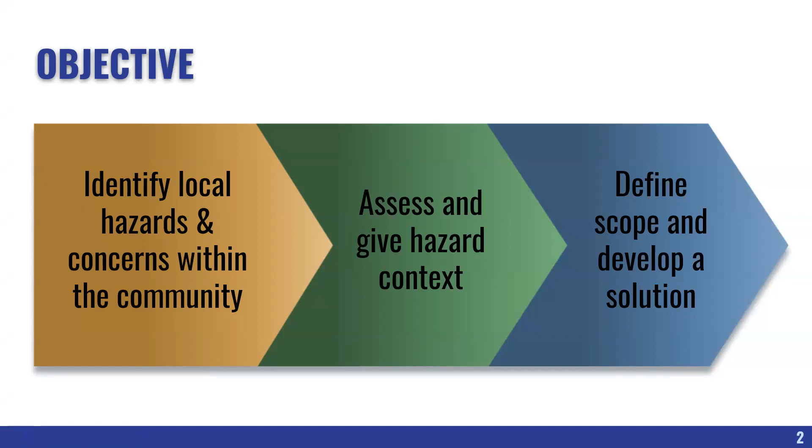So the main objectives for our senior design course specifically were to identify local hazards in the community, and then to give context to that hazard and assess it through creating a project scope and developing a solution for that hazard. So in order to fulfill this objective, we were tasked with using the design thinking process, which breaks down the project into 5 main steps.

First one is empathizing with the stakeholder. In this case, it's the whole community, and being able to see what kind of hazards are in place and what things could happen again. Defining, actually selecting a hazard; ideating, which is brainstorming, coming up with solutions; and then prototyping and testing is really seeing, is our solution effective and useful?

So before we could pick a hazard, we had to empathize with the Houghton community. And to do this, we took a look at the local population and the risks to safety and how transportation is affected in the area. And some major incidents that we looked at were the yearly snowfall, the Portage Lake lift bridge outage, and the 2018 Father's Day flood.

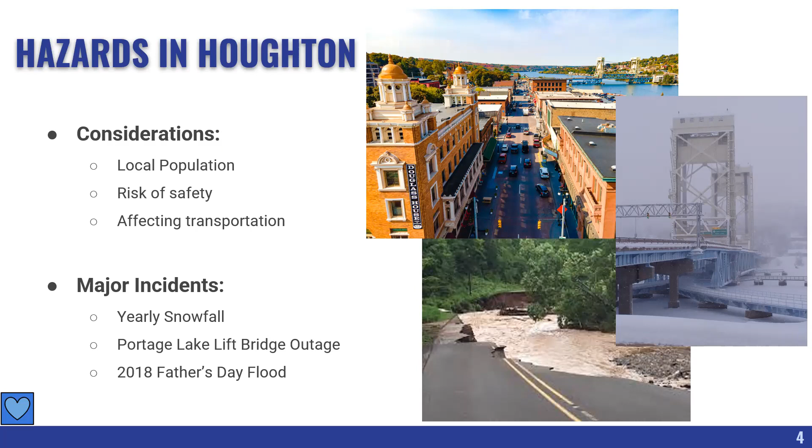So going more off the Father's Day flood, it was a 1,000-year storm event with a 500-year storm event the following weekend. It affected central Houghton County and it overwhelmed the roadways with the amount of water that was thrown on during that time. And for Agate Street, as in here, it caused catastrophic failure of the roadway, where it was unusable until it was able to be remade.

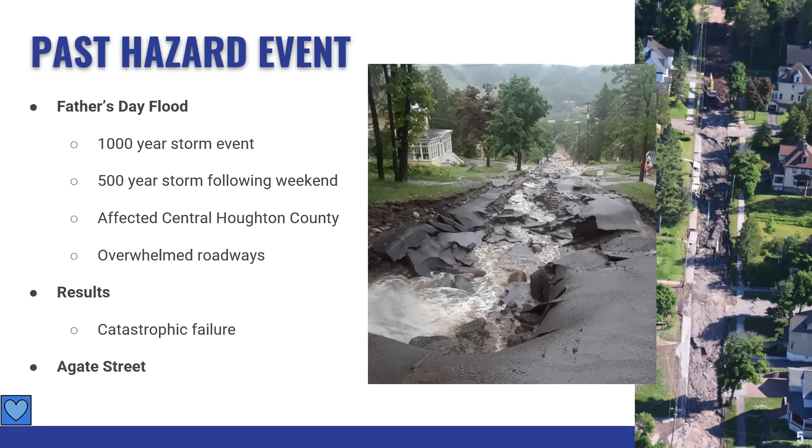So the reason that we chose to focus on Agate Street is because it failed worse than most of the other roads around here. And the reason it failed so bad was because, in combination with the steep slope and the large amount of water, the water went over the sides of the road and eroded the soil along the edges, and eventually got underneath the road and washed out all of the sub base underneath, causing it to completely just collapse because there's nothing there to support it.

And so the main objective of our project was to come up with some kind of solution that would prevent that kind of failure from happening again. And like we mentioned before, the main stakeholders of this project are the residents that live along Agate Street, US 41 traffic, and the Houghton community.

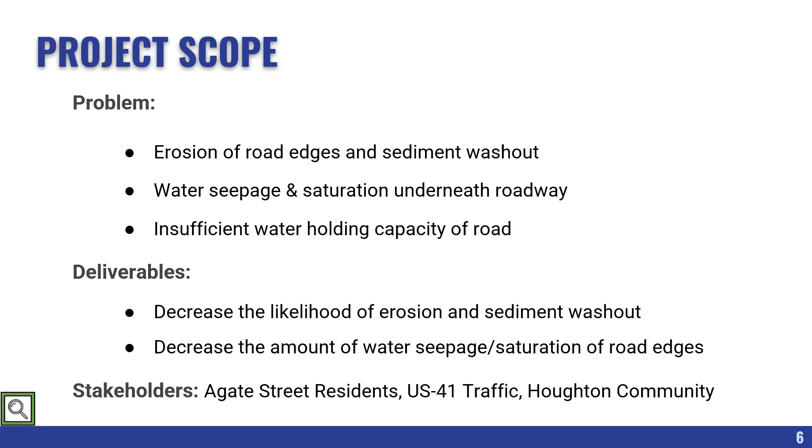So we started our brainstorming process. We came up with 3 ideas initially. The first was a curb and gutter system; we were thinking that would just act like a wall to keep the water from going over the edges of the road. Our second idea was to repave the road with a reverse crown instead of a normal crown in the middle like the road usually has. So that would keep the water in the middle of the road instead of directing it towards the edges and washing out more soil. But along with this idea would come ice build up in the winter and more wear and tear on the road.

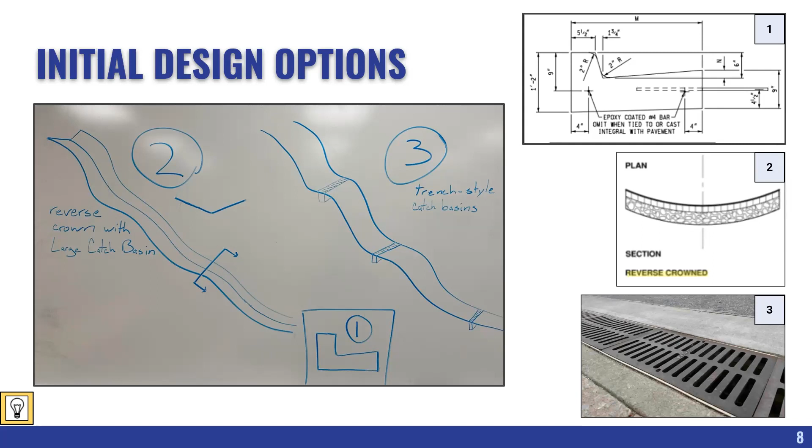So to better understand the specific pain points of our hazard, we decided to perform a hazard analysis where we took the varying potential failures and their effects, and we quantified them by assigning numbers to things like failure severity, probability of occurrence, and probability of detection. We would multiply them across for each possible failure, and then it would give us a risk priority number.

So the highest risk priority number is going to be more concerning and more hazardous for us. And as you can see, erosion on the street edges and saturation beneath the road, like Curtis talked about earlier, is going to be our biggest issue and most concerning, and have the highest RPN number.

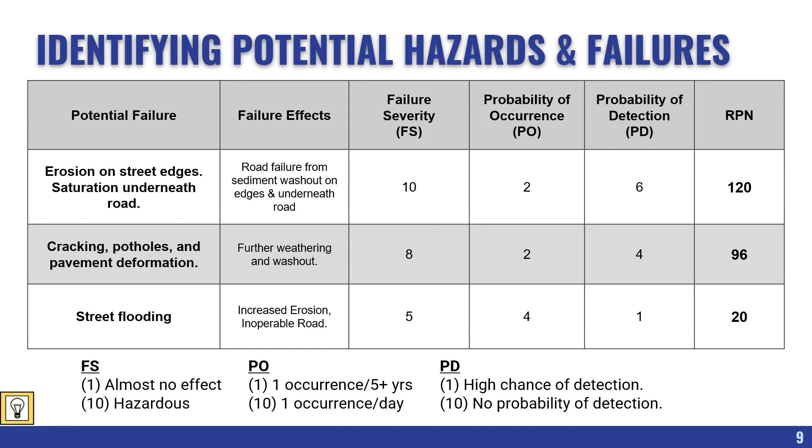Well, after this comparison, the curb and gutter system proved to be the most effective way to reduce and mitigate this event from happening again. Adding curb and gutter on both sides of the road would strengthen the roadway by the use of concrete, but at the same time keep the water away from the edges and keep it on the road surface itself. There's many different types of curb systems out there.

We decided to use a barrier style curb system to have the most effect for our calculations, to have a higher wall on both sides of the road to once again make sure that the water doesn't move on both sides.

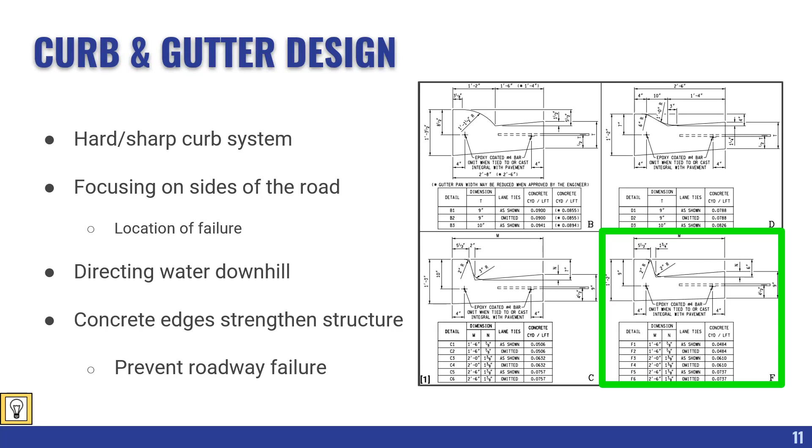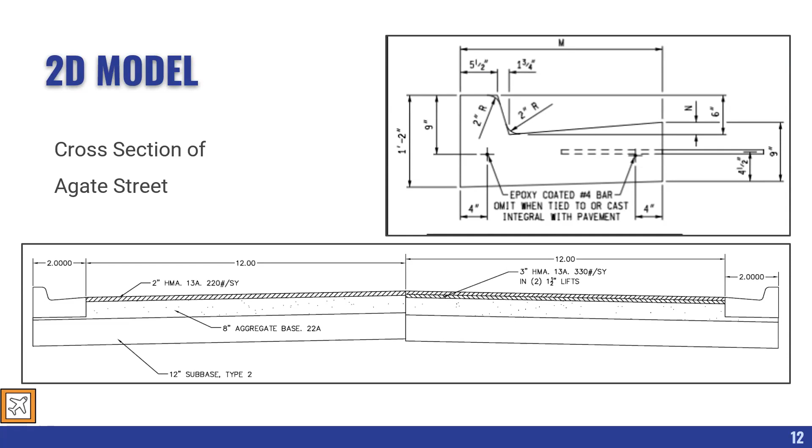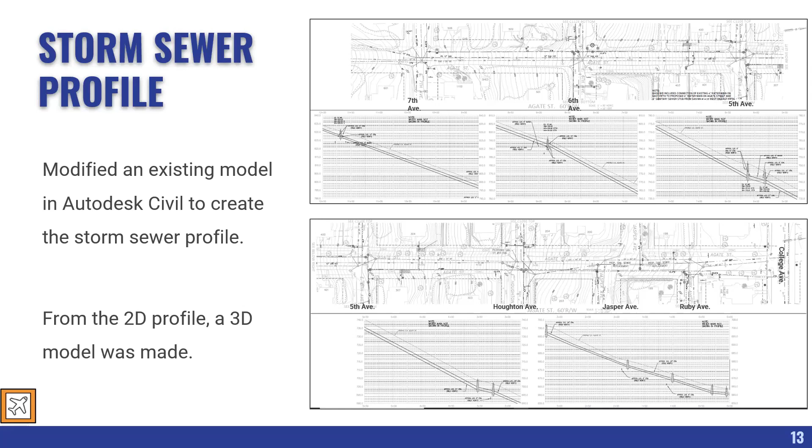And then also we were provided with the storm sewer profiles for the road. So since there wasn't the pipe system in the file that we received, we had to cross-reference it with the plan view of where the storm sewer manholes and inlets were located, and then put them at the elevation that they were assumed to be. So if they were going to do this project, they'd have to field check those locations and elevations, but that's our best estimate of where all the manholes are. And then from the 2D profile of the road, a 3D model was made in NX.

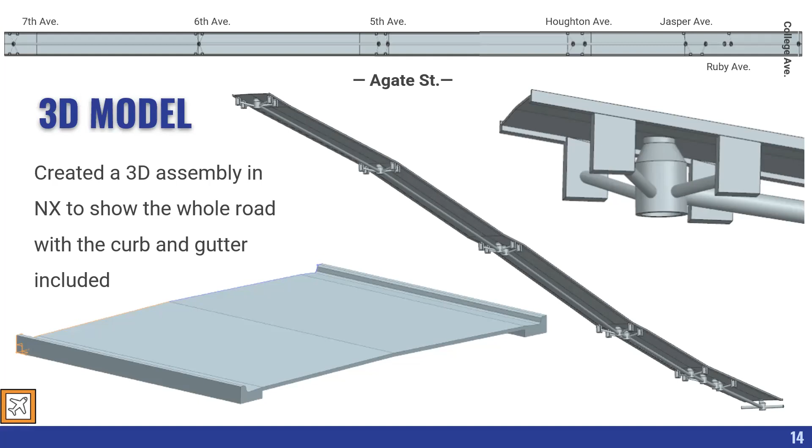So after modeling the roadway and prototyping it, we wanted to bring the Father's Day flood back into our calculations to really see, is this going to be an effective design to prevent this kind of catastrophic failure from happening again? From the Father's Day flood, we were able to see that between the hours of midnight and 6 a.m., about 5.5 inches of water fell that day.

And through that data and through numbers produced by the National Weather Service, we were able to come up with stormwater runoff specifically for the roadway. So these are return years and the amount of flow that you would see on the roadway based on a yearly storm. So once again, the Father's Day flood was a 1,000 year and the following weekend was a 500 year.

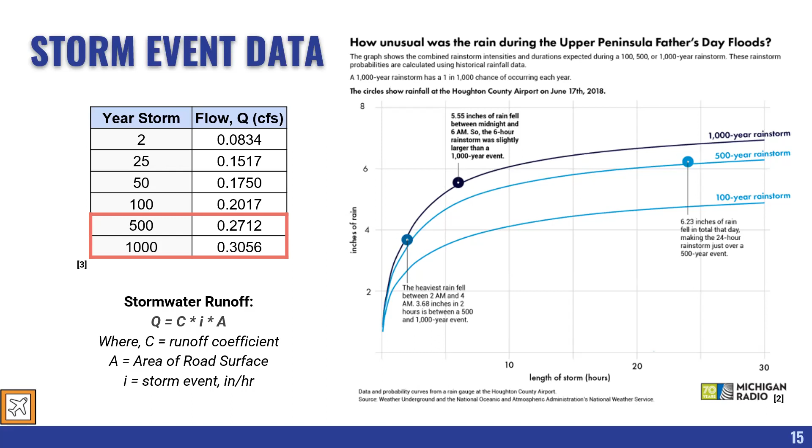To get a good idea of what the street currently can handle, we decided to use the Manning's equation and treat cross sections of the road as an open channel using steady state flow. And we calculated the flow for the minimum and maximum, which was at a slope of 1.1% and 13.6%. And that was largely at the base of the road and the top of the road.

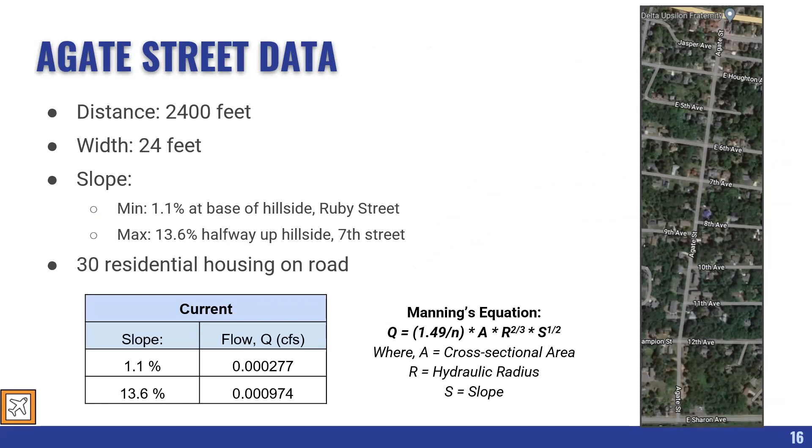And it's also important to note that when we did the stormwater runoff calculations, we only did the calculations based off of the rainwater hitting the road. It doesn't account for any side streets water inlet or any runoff from lawns and houses and things like that.

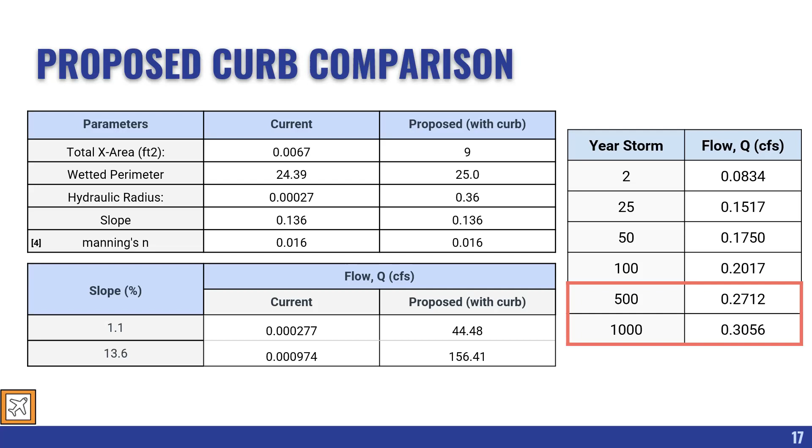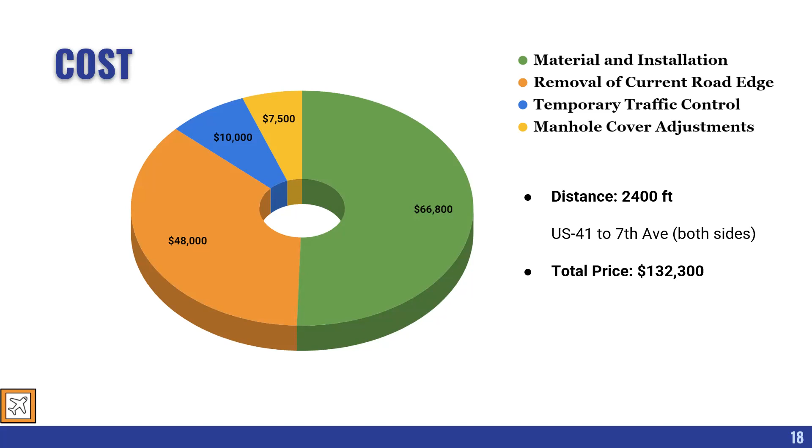And for the schedule, we're saying that this project will take 6 weeks. We have 4 weeks in actual construction time and a week at the beginning for site prep and a week at the end for any delays or cleanup.

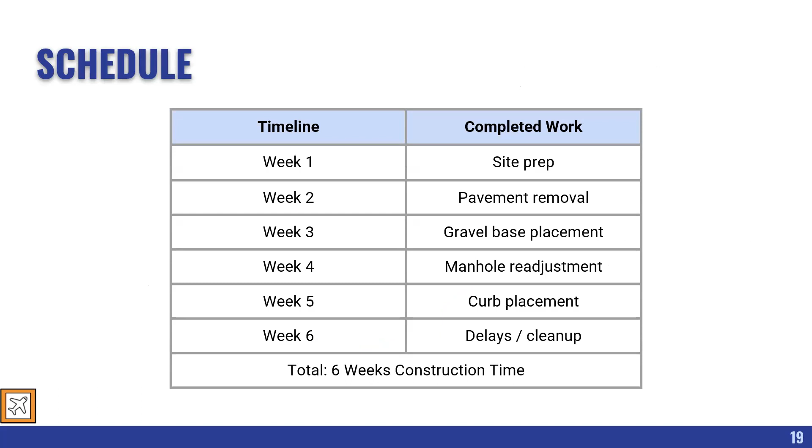So ultimately, we chose this design option because it better directed the flow and strengthened the sides of the road, and ultimately helped our project design scope and fulfilled those parameters by making sure that there wouldn't be any more erosion and subsequent saturation underneath the road. It also was a cheaper option because it's most common and it would be easy to tie into the existing stormwater sewer system that we have going on.

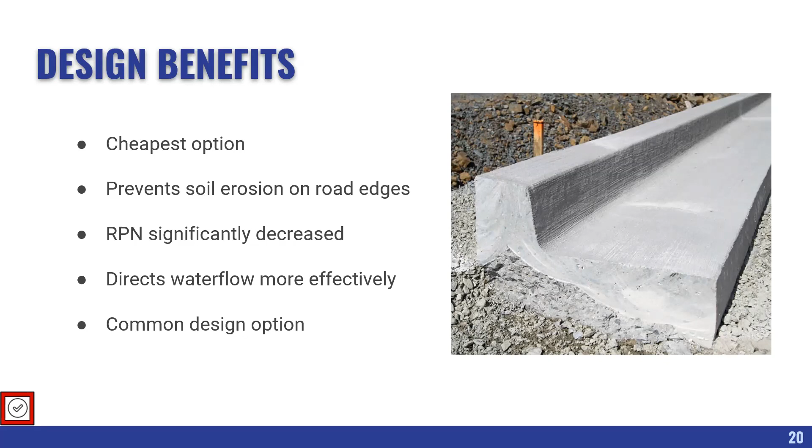And it's important to note that in our design, the storm sewer system is still the same one that's in place, so there is a possibility of it flooding over if there is a big rain event again, but a benefit of the curb is that it keeps the water on the road rather than going over and washing out the sides of the road, which is what it did previously.

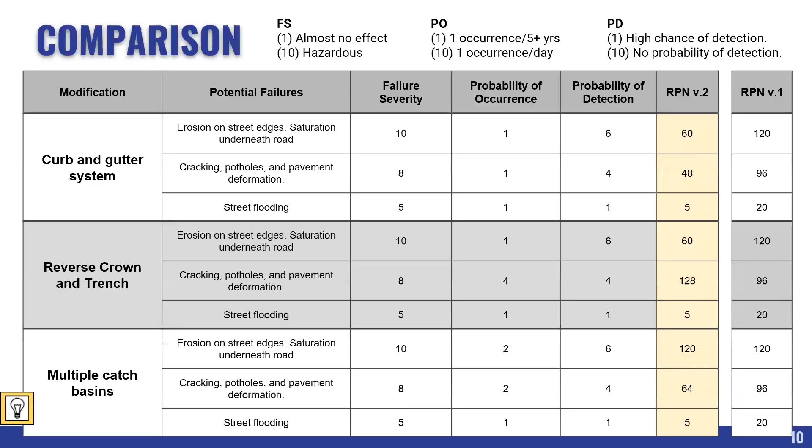So with the curb and gutter, it'll be better directed into the storm sewer system for average rain events and stuff. It's still a possibility that the whole storm sewer system will flood in the event of like a 1,000-year storm, but that would happen anyways. But in normal rain events, it should better capture the water that's on the road and prevent flooding down the street.

This is just a comment. I was told by one of our former instructors who lives on Agate that the flow down the side streets was an issue. Historically, before it was built as a road, it would have been like a ravine going down the hill. And so one issue is that the flow coming from the side streets sort of carved out at the bends and started to undercut the pavement. So just thinking that maybe the curb might need to be extended, kind of wrapped around to go up those side streets and keep the flow on the pavement.

How does that affect snow removal? I would assume that the snow removal, they would do it the same. I would hope that the plows wouldn't affect the curb, like chipping it away and eroding it, but there's a consideration. I mean, it's similar to every other road in Houghton. There are other roads that have curbs. It's not unheard of to see a road with curbs. So blaming snow removal, or that the curb affects snow removal, is very minor if you were to compare catastrophic failure versus snow removal.